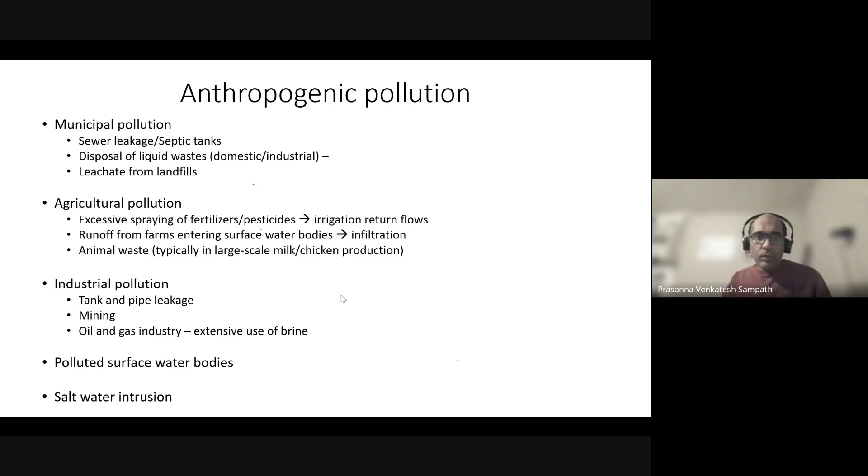All right. So we also spoke a little bit about the different processes by which some of these pollutants which enter the groundwater or the surface water bodies can be naturally degraded. So that's a fancy word over there, attenuation. Attenuation is just another way of saying degradation or reduction of pollution, right? So there are these different processes that allow the pollutant to naturally be degraded over a period of time: either by dilution or by adsorption or by some kind of chemical reaction which reduces the concentration of the pollutant, or microbial decomposition, or just simple physical filtration, right?

Of course, the efficacy or the extent to which these different processes can work on any particular contaminant depends on the nature of the contaminant, right? So if you don't have, for example, a contaminant with large particle size, filtration cannot work. Or if I have a contaminant which does not react with any of the existing minerals present in the groundwater or in the subsurface, then chemical reactions are no longer possible. Similarly, adsorption may not always work with every type of soil, or every contaminant may not adsorb on different surfaces. So the extent to which these processes can degrade the pollutant will vary from one situation to the other.

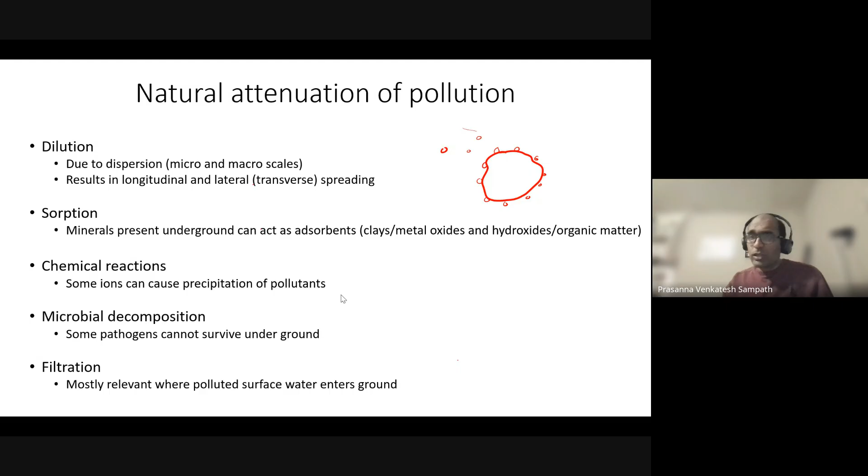So now we are going to move on and talk about the transport of these contaminants. And please remember that we are not speaking about any particular contaminant. We are talking about the general idea of how any of these contaminants can get transported in water. And again, I shouldn't even say water. It's also commonly applicable to air as well. Through any fluid, if a contaminant is getting transported, these are the processes that govern its transport.

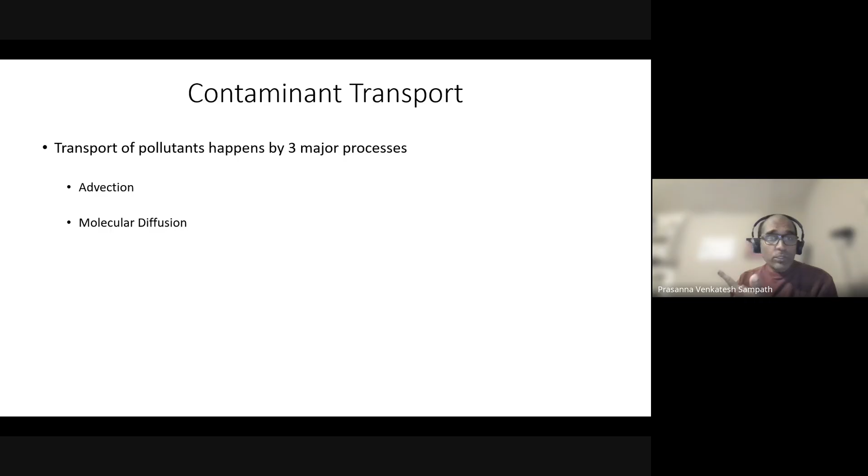So there are three major processes that typically govern the transport of contaminants. One, advection. I'll talk a little bit about that. The second process is molecular diffusion, and the third process is mechanical dispersion.

So advection is when the contaminant simply moves along with the fluid, right? The fluid is moving with a certain velocity, and if the contaminant is present in that fluid, it simply moves along with the fluid. That process is referred to as advection.

Some people also call it convection, but that is more relevant if we are referring to heat, right? In the context of contaminant transport, we prefer the word advection, which refers to the movement of the contaminant along with the fluid. That's the first and probably the most major process that governs contaminant transport. The second process, molecular diffusion, is some kind of random Brownian motion that happens, right?

So this molecular diffusion is a random Brownian motion. So it's basically at the scale of the molecule, right? So that's why we can call it molecular diffusion. So we have this random motion of these pollutants in the water or in the fluid, which is also one mechanism by which the contaminant can get transported from one place to the other, right?

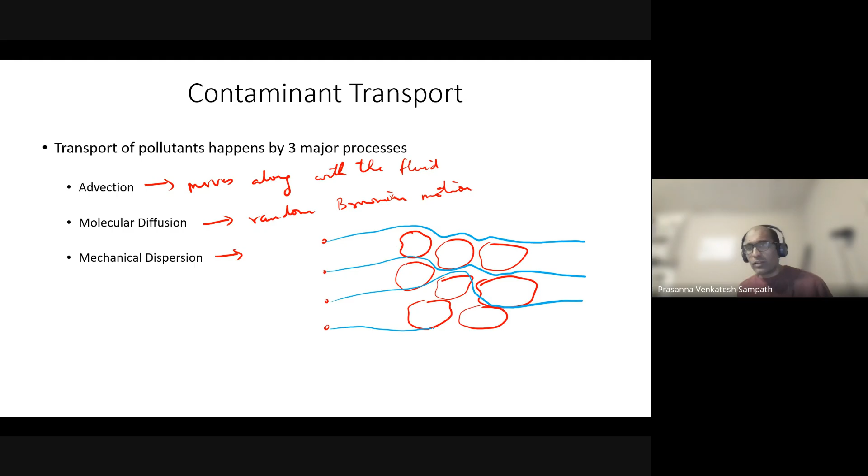So let us say this particle moves around these and ends up here. This particular particle probably tracks a different path and then ends up here. This particle might follow another path. I'm not able to go exactly in between the soil particles, but you understand what I'm trying to do. So the particles started off at a particular point and they've all traversed, let's say, a horizontal distance of L.

Is the distance covered by each particle exactly the same? Obviously not, right? Because each one is tracking a different path depending on how the particles are arranged in this particular setup. Each particle is going to follow a different path, and although the distance traveled by them is the same, the time taken for each particle will be different, which means the velocities that the particles have experienced over that distance are going to be different.

But do we really know the velocity at this level of detail? We don't. We will typically be talking at a much higher scale. We are probably going to say that the velocity between here and 100 meters away is, on average, 1 centimeter per day or 15 centimeters per day, something like that. But that 15 centimeters per day is representative of all of these different particles, right?

So although in reality each particle will experience different velocities, all of these particles will be given one representative velocity because we are unable to find out all the different velocities that the different particles are going to experience, right? So the outcome of all of this is that in reality there is a velocity variability, right, which we are unable to accurately characterize.

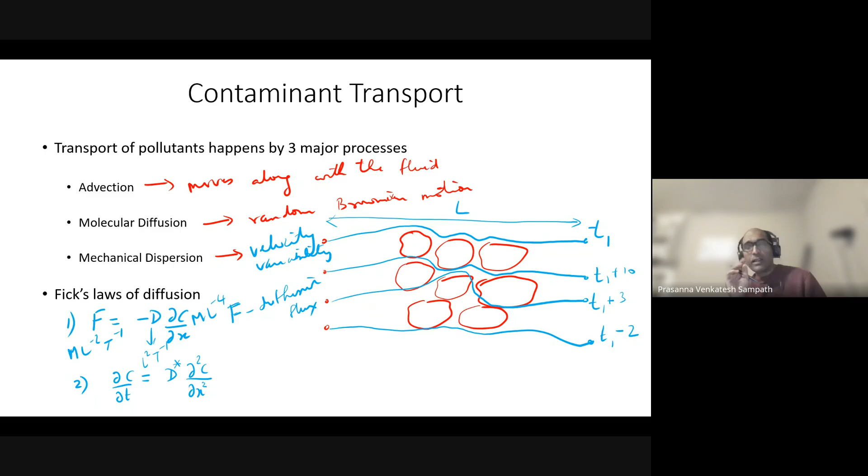Okay, all right. So instead of looking at mechanical dispersion and molecular diffusion as two individual processes, what is typically done is to combine the impact of these two, mechanical dispersion and molecular diffusion, into one process, and that is sometimes referred to as hydrodynamic dispersion. Okay, so I'm again introducing a lot of new terminologies, but don't worry about it.

So what it is telling us is that both dispersion and diffusion, whether it is mechanical dispersion or molecular diffusion, the impact is to spread the contaminant, right? What does molecular diffusion do? From regions of high concentration, the contaminant moves to regions of low concentration, which means what? It is going to spread.

Okay, and mechanical dispersion, because of this velocity variability, has the exact same impact, right? So instead of having two separate processes written in this way, it has been felt that why worry about these two processes as if they are completely different from each other. Why not just include them into one process? So that is what we refer to as this hydrodynamic dispersion.

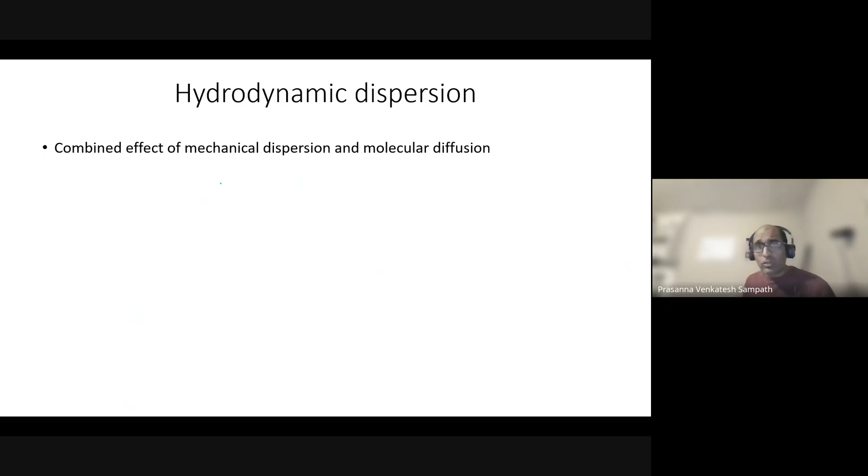So the total flux due to hydrodynamic dispersion, so I'm going to call it H disperse, is basically a combination of the mechanical dispersion and the molecular diffusion, right? So these two together give me the total flux that happens due to this new process that I'm introducing, which I'm going to call hydrodynamic dispersion. Now, this molecular diffusion, we had a diffusion coefficient, which we call D star.

Okay. Now suppose I come up with another. I'm going to call this the longitudinal dispersion coefficient. Don't worry about the L. I'll get to that shortly. But now let us think a little bit about this mechanical dispersion. Okay. When you say velocity variability, let me ask you a question.

Now let us say I have a running race over a short distance. Let's say a 100-meter race. In a typical 100-meter race, what do you think will be the time difference between the winner of the race and the person who comes last? Will it be a long time or will it be a short time? Long or short?

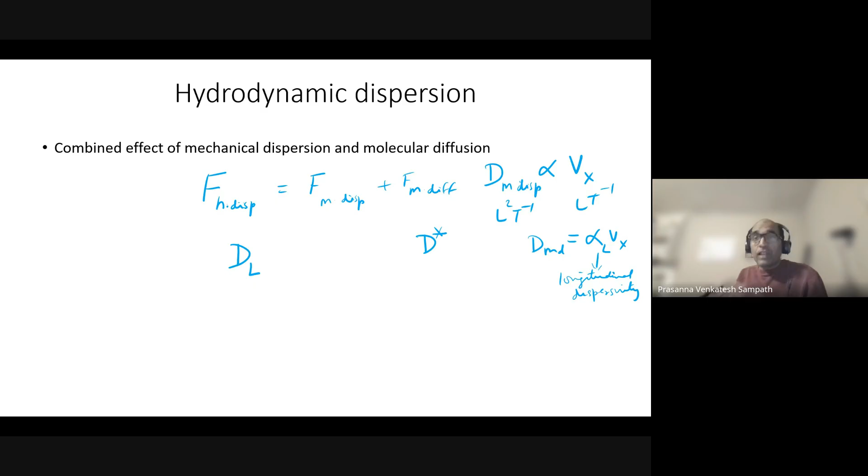Because a drop of ink that drops into that river will get transported along with the river and it will start dispersing. But it does not mean that it will not disperse in the other direction as well. The majority of the dispersion will happen in the direction of flow, but some dispersion will also happen in the direction perpendicular or orthogonal to this direction of flow. So the dispersion in the direction of the flow is called longitudinal dispersion, and the dispersion perpendicular or orthogonal to that is referred to as transverse dispersion. Transverse.

Okay, so the majority of the dispersion is going to happen in the longitudinal direction. So we will first deal with that. The transverse dispersion can be expressed in some senses using some kind of anisotropy ratio. If longitudinal dispersion happens to some extent, then the transverse dispersion can be 1/10 of that or 1/100th of that, and so on, right? So we don't have to really get into that.

Okay, so anyway, this hydrodynamic dispersion is the combined impact of these two processes, mechanical dispersion and molecular diffusion. So I'm going to denote this with dl, the longitudinal dispersion coefficient, which is going to be alpha L times Vx, which takes care of my mechanical dispersion, plus d star, which takes care of my diffusion. Now, fortunately, this d star, this diffusion as a process, is comparatively much smaller in magnitude in relation to whatever happens due to mechanical dispersion, right?

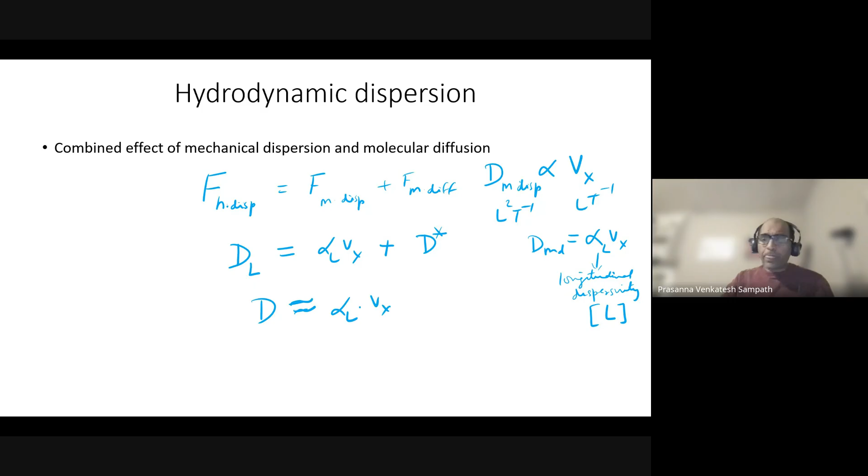No questions. Okay. So now this hydrodynamic dispersion, like I said, is this alpha L times Vx. Now this alpha L is, okay, I shouldn't say product, is an outcome of the length that the contaminant is going to get dispersed over a certain time duration, right? So what people typically do is that depending on the length that the contaminant has traveled, you can come up with some kind of an empirical expression for this alpha L.

Okay, so sometimes people say if the contaminant has moved by a distance L, then the longitudinal dispersivity is 10% of L, or 0.1 times L. There are other expressions available. I'll just write down one that's available in the literature. Of course, this is an empirical equation. It's not something that you need to memorize. So it's 0.0175 times L to the power 1.46, something like that. There are other empirical expressions available, like 0.83 times log L to the power 2.414, something like this.

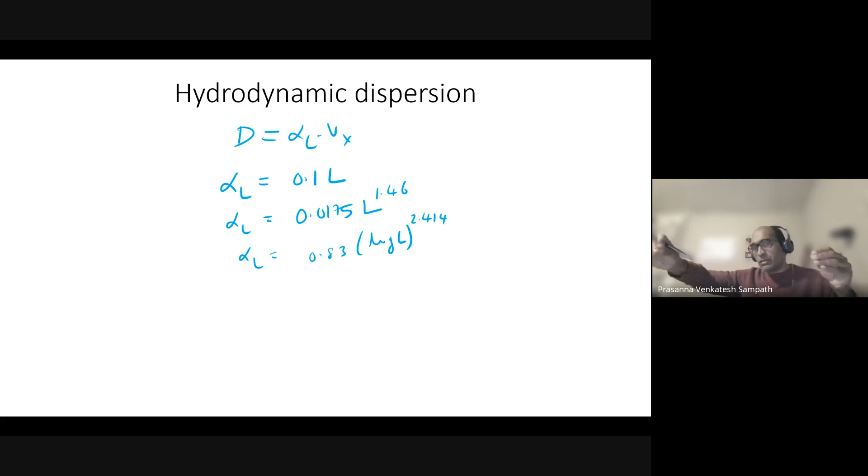So basically what it is telling us is that the extent of dispersion depends on the length of travel. The longer the contaminant travels, the more it is expected to disperse. That's what all of these expressions are saying, right? The first one, the simplest one, is to say it's 10% of the total distance traveled by the average contaminant. The next one is giving it a power, right? So the longer L is, the more alpha L will be. It doesn't increase proportionately; it's some kind of a non-linear relationship. Similarly, the next one has got a logarithmic term, and then it's raised to some power. So this is as far as the longitudinal dispersion is concerned.

Now the transverse dispersivity, that's referred to as alpha T. Transverse dispersivity is basically the dispersion that happens to the contaminant in a direction orthogonal or perpendicular to the direction of flow. This one is typically ranging between alpha L by 100 to alpha L by 10, right? So it's 1/10 of the longitudinal dispersivity, or maybe 1/100th of the longitudinal dispersivity. This is the typical range of values that the transverse dispersivity can take. Any questions before we move on?

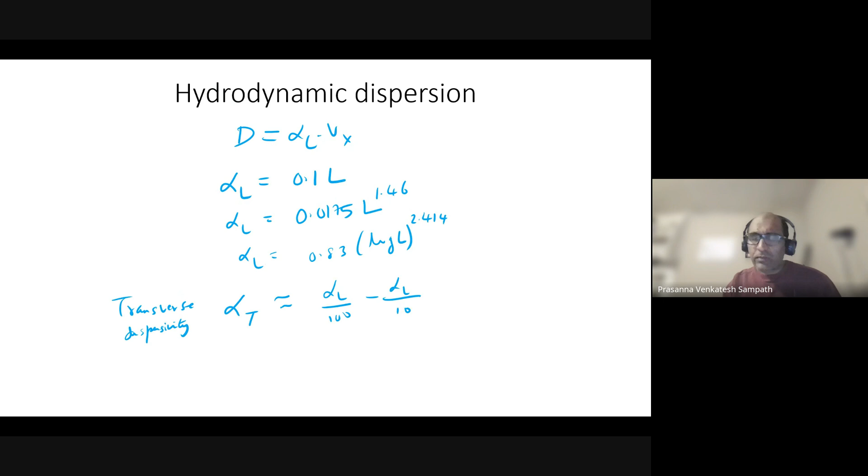All right. So this is a very dry topic. There's going to be a lot of new terminologies that you will encounter, and then of course there's also going to be some of these empirical expressions. Of course, you're not expected to memorize any of this, but just keep it in mind. Okay.

All right. So now, when I'm looking at transport of these contaminants, what we can say is that the total mass that the contaminant is getting transported, so let's say the total mass flux, is basically a combination of the flux that gets transported by advection, so F advection, and the portion that gets transported by dispersion. Now I'm going to call it dispersion with the understanding that it incorporates the effects of diffusion into it, just like we spoke about a couple of slides back.

So we have hydrodynamic dispersion, which is a combination of mechanical dispersion and molecular diffusion. Molecular diffusion, relatively speaking, is so small in comparison to dispersion that we can, for all practical purposes, ignore it. But if the situation demands, then we might have to account for diffusion also. It depends on the relative magnitude. But broadly speaking, the total mass of the contaminant that is getting transported is the sum of the mass transported due to advection and the mass transported due to dispersion.

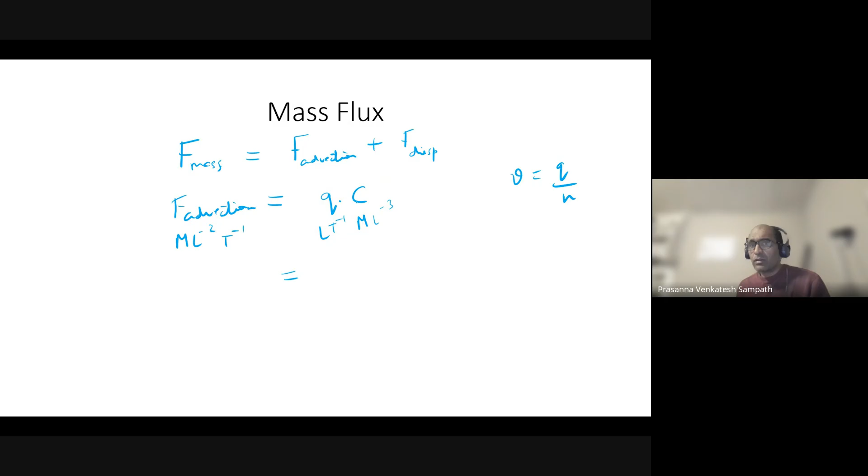So if I replace that over here, q is nothing but n times v, or vx, let's say, just to be consistent with what we wrote in the previous slide. So n times vx, assuming the flow is predominantly or only in the x direction, n times vx times c. This is my advective flux. Okay, I'll just take one more minute and then I'll stop with that.

Okay. Now the dispersive flux is going to be, like we said, proportional to minus dou c by dou x, right? The concentration gradient, right? Similar to whatever we had. So I will say it is equal to minus D times dou c by dou x.

Now, again, here you have to be careful, because this equation can work perfectly well whether this contamination is happening through surface water or groundwater or air pollution, whatever it is, right? But when it comes to groundwater, because we are still talking in the context of groundwater, we have to keep in mind that this transport of the contaminant is not happening through the entire cross-sectional area. It is only happening through the portion where the water is moving, which is only the porosity, right? The entire cross section of a soil sample is not transporting the contaminant.

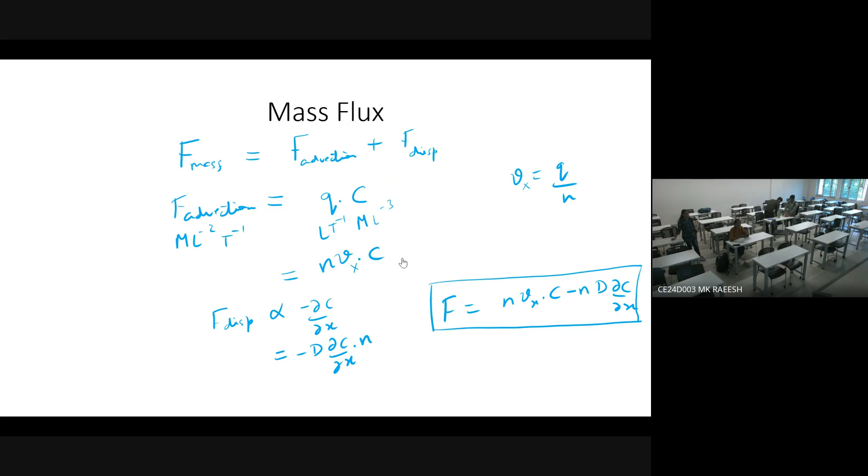Oh, so when do we meet next? When does the midsem break end? Does it end on Tuesday or... So Tuesday is holiday? Tuesday is midsem break. So we'll meet next Wednesday. So one week from now we'll meet. Yes, sir. Okay, that's fine. No problem. Have fun, everybody. Chalo, bye bye.